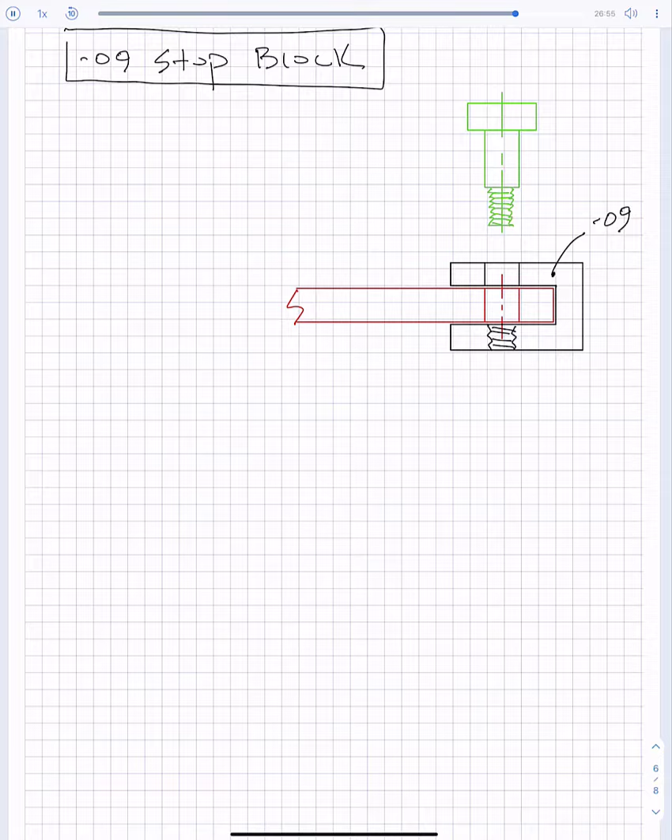We're back to our RF load tray assembly part models, and this is the last of the 5. It's a -09 stop block. So that's going to be this part right here. It's the -09. And I've given you a part number as the lead designer.

I've already given you the shoulder screw part number. And this is a McMaster-Carr part number. The part number is listed on the handout. And so that'll define the diameter of this shoulder here, and also the other parameters. And so you've got that part of the design.

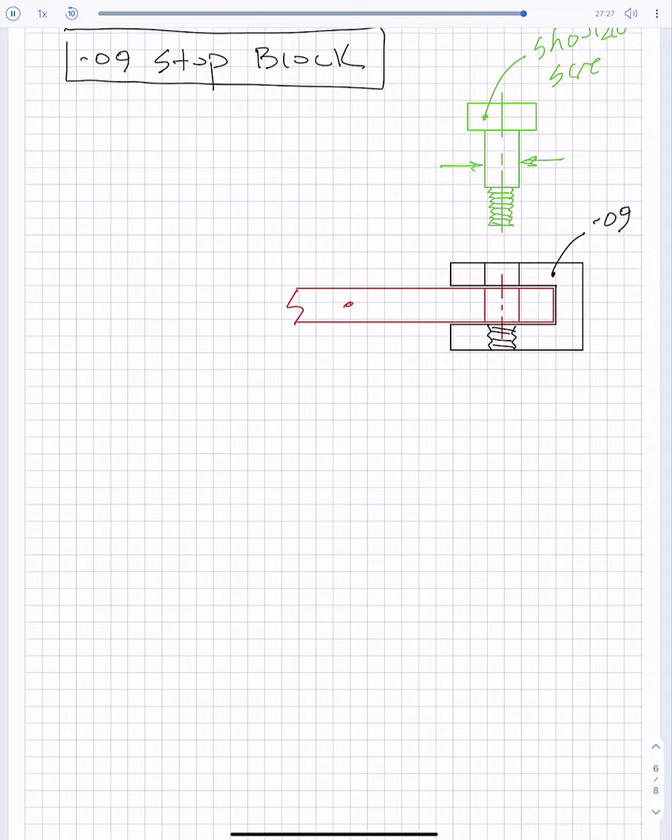You also have my base plate. This part I've drawn in here is my base plate. So you need to design a stop block that will sit at the back end of that recess inside the base plate. And this stop block is going to go on there, and that's going to define the shape of your part.

So the shoulder screw is different than a regular screw in that there's a shoulder. There's a precision ground diameter at the top there. And that's going to be a precision fit with the top part of your hole here. That hole is going to interface with a tight fit for the top part of the shoulder screw. And on the bottom side, this thread here will have to match, obviously, the thread of the shoulder screw.

In between, we're going to have a gap between your part and my plate. So I'll label it right here. This distance right here, it's going to be some small gap similar to what we used on the capture block. So I'll just call that gap, and the size of the gap is going to be determined by the designer.

And if you make it too small, something like 5 thousandths or so, I want to say that's too small because the tolerances are such that if we're on the low side of the tolerance, it could be an interference fit. If you make it a 1/4 of an inch, that's going to be way too big. It's not going to be able to stop anything. And so choose a gap that's the same gap all the way around.

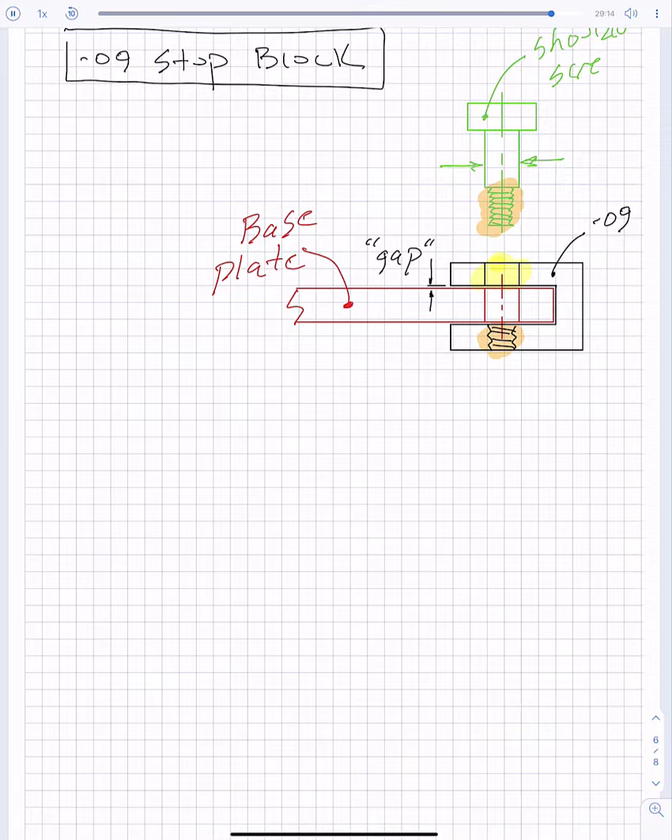And the other thing you're going to want to do is on my base plate, I strategically located the top plane that goes right through the middle of the part. And you're going to want to do the same thing on your part. You're going to want to put your top plane right through the middle of your part, and that's going to make the assembly much easier. We'll just line up those top planes, and that gap will be equally spaced on either side.

So let's talk about some of the requirements. The material, like all the other parts, is going to be aluminum. You'll choose the alloy you want to use, and you'll choose an appropriate finish. And the hole sizes need to match the shoulder screw, and it needs to fit on my base plate. And so other than the pictures I've drawn there, maybe that's the only requirements we have.

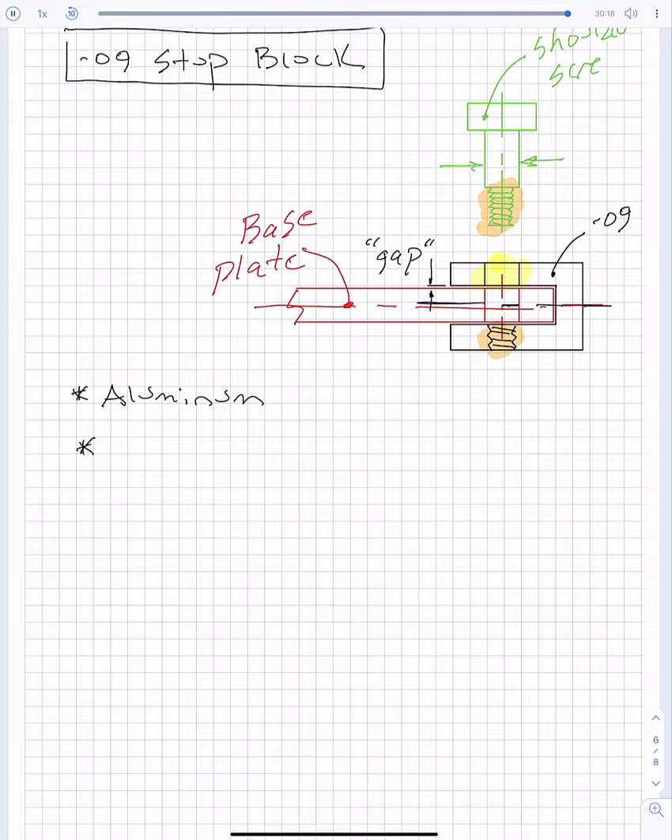There's no fasteners for you to specify. I've already given you the part number of that shoulder screw. So you'll just have to download that shoulder screw from McMaster-Carr, save it as a SolidWorks model, and that'll be part of what you deliver to your team members. So I'll just put McMaster-Carr, download SolidWorks part.

Okay, so that should take care of that last part. And now I believe everybody knows what they need to do to get started on the RF load tray parts. I'll do another video to show you how to do some of the details of the CAD geometry creation, and then we'll finish up with how to do the assembly model and drawings for the individual parts and the assembly model drawing. Assembly model drawing will include how to do an exploded view, how to make a bill of materials, and how to add balloons and quantities on the face of the drawing.